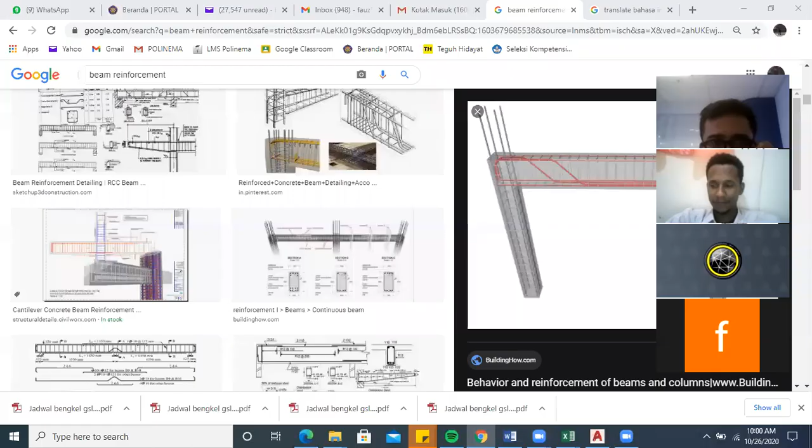Okay, this is the nice example.

Okay guys, now let's talk about the stirrup. I want you to focus on this part of the stirrup. This stirrup between the support and also the field will have very different spacing.

Why is that so? Because this is actually based on the calculations in mechanics of engineering, I won't explain that. But one thing you have to understand, this is the area of the support. So if you take a look, the stirrup is very close in the support, but it will have long spacing if the position is in the middle of the field.

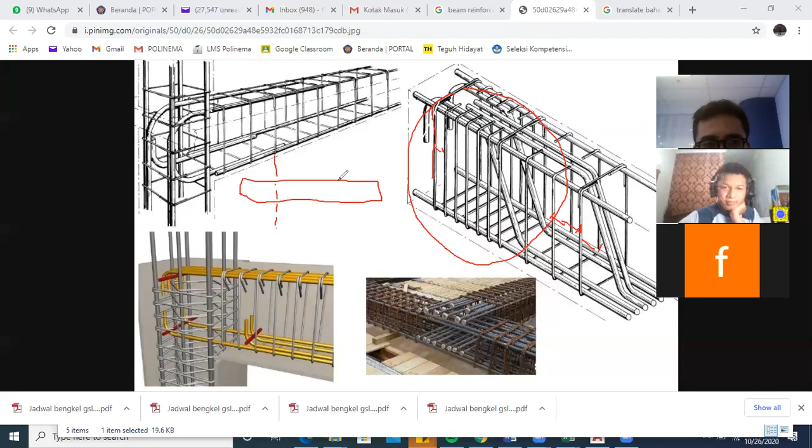Okay, for information, if I have a beam like this, the quarter part of the length will be the support, and a quarter here will be support, and a half will be field.

This can be noted, this is the basis from mechanics of engineering. So if I have a beam with the length 10 meters, my support in this part will be 2.5 meters, the support over here will be 2.5 meters, and the field will be 5 meters.

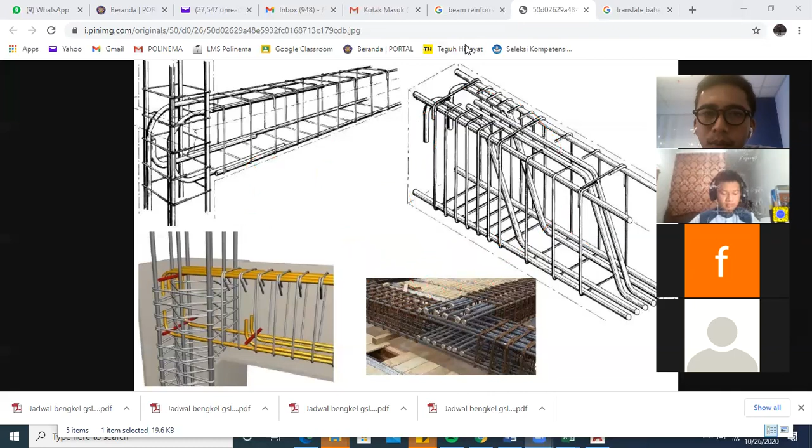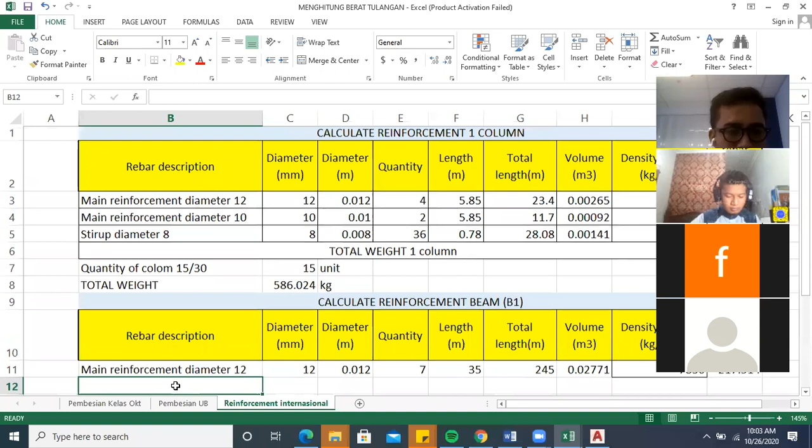Okay, after understanding those concepts, let's calculate in Excel again. I will write down the stirrup here, the stirrup with diameter 8 again.

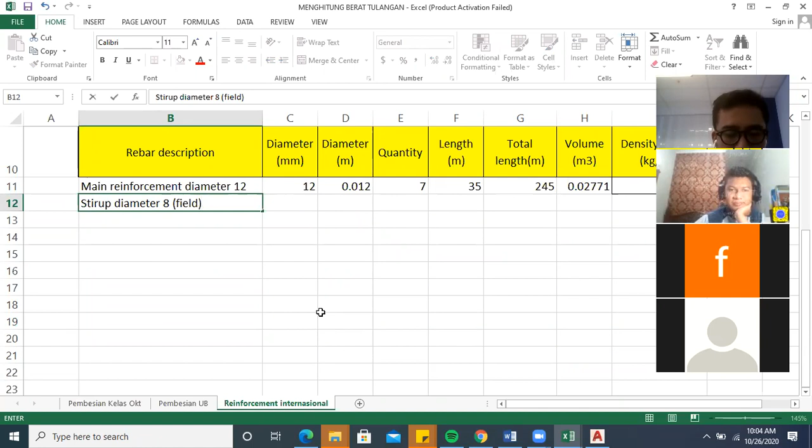But the position is in the field. I will do the same, I will make stirrup diameter 8 in support.

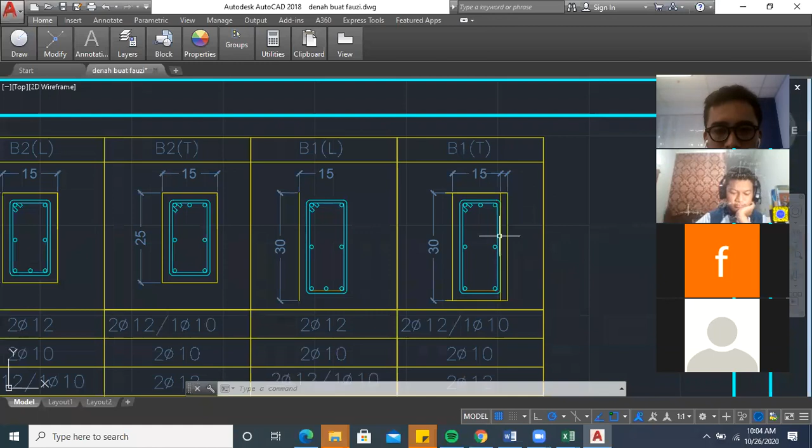Okay, I have the stirrup diameter 8. How do I know this diameter? I have to take a look based on the detail drawing. Okay, the detail - oh sorry, unfortunately it's not 8, I will revise first.

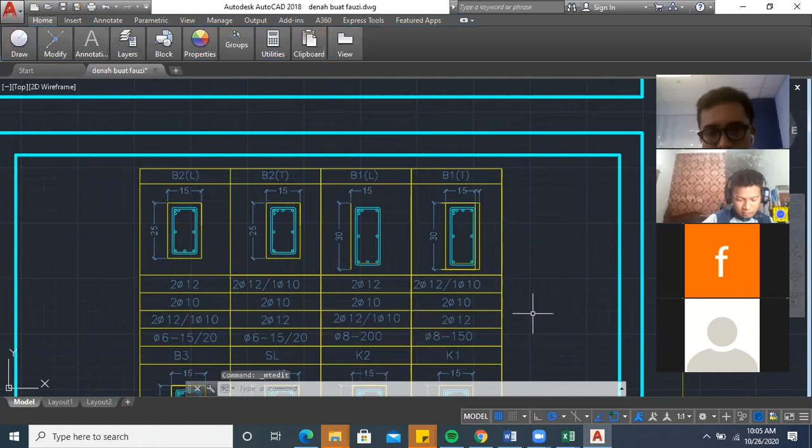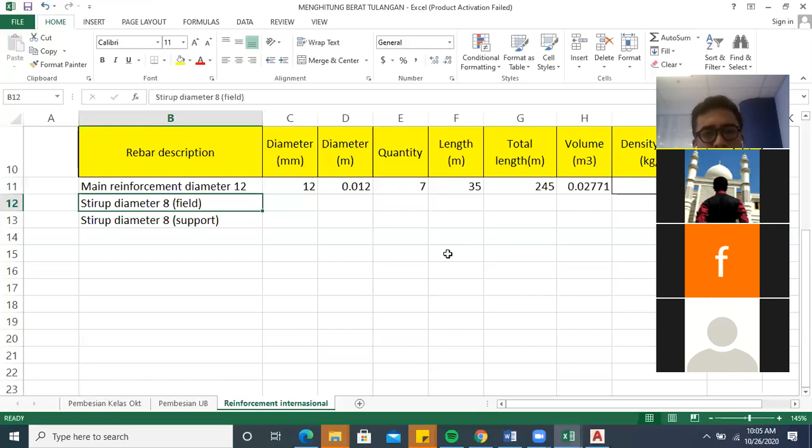Okay guys, so this is the spacing in the support, and this is the spacing 200 in the field. Okay, now first I will put the identity diameter 8. I will find the diameter in meters. Now the quantity.

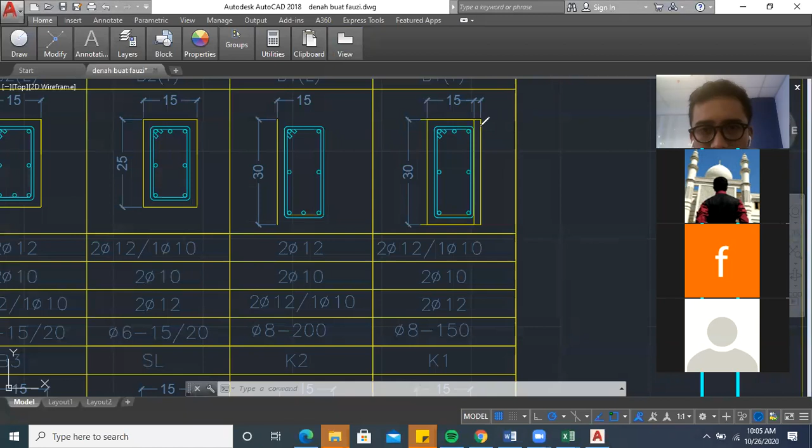Okay guys, after we calculate the stirrup, the band reinforcement, what we have to do next is calculate the length of one stirrup. So how do we find the length of one stirrup? Do you still remember how from before? You still remember, guys, how I can calculate the length for one stirrup?

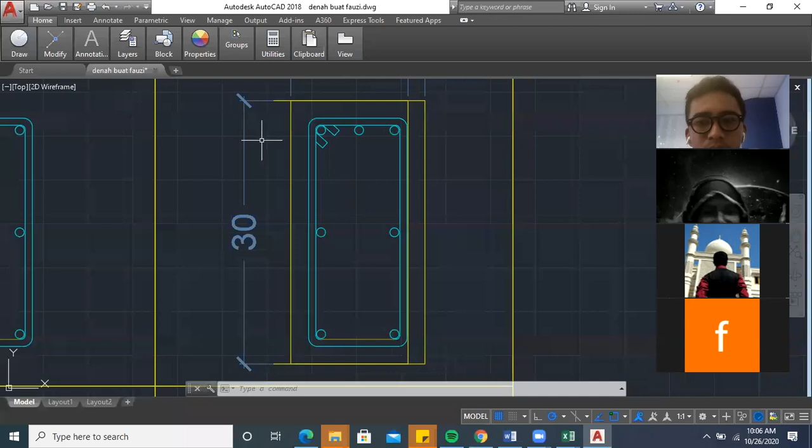Forgot, sir? Oh, forgot. Okay. This is the section of the beam with the dimension 15 by 30. We already know that the concrete has the concrete cover over here.

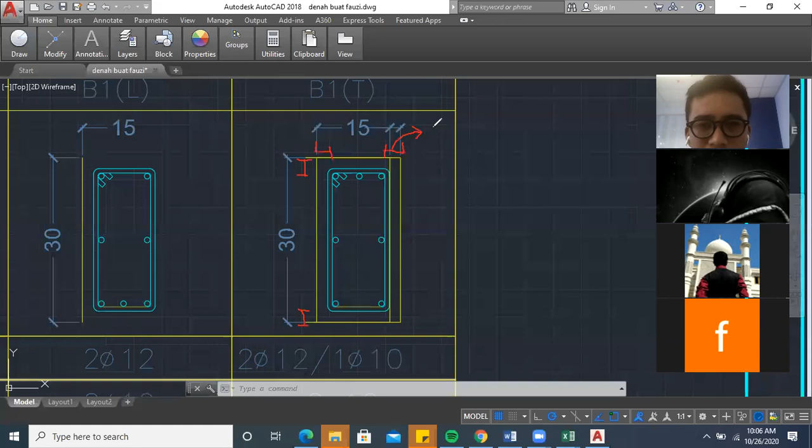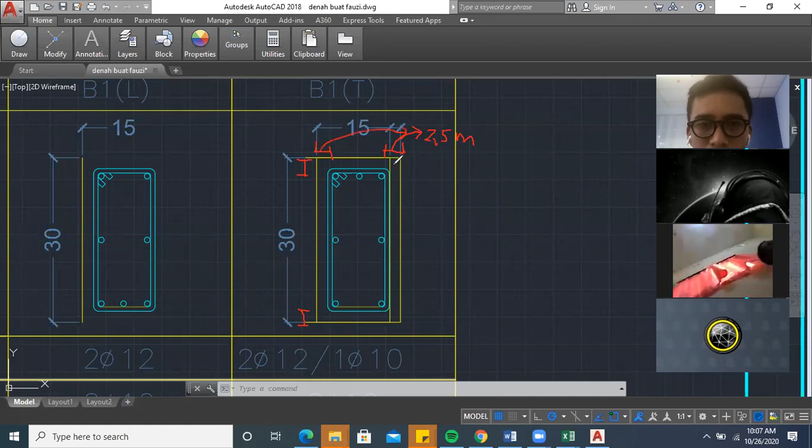To make the numbers nice. Let's assume that the concrete cover between this part and the reinforcement is 2.5 centimeters. This is 2.5, this is 2.5, and this is also 2.5. So the question will be, how long is this part actually?

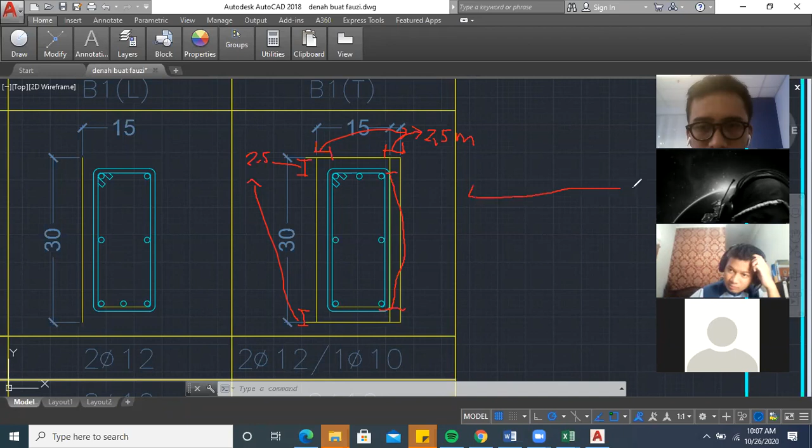How much? Okay, 25, 25 centimeters. What about this one? 10, sir, 10 centimeters. Okay, so I have 25 here.

If the stirrup reinforcement is extended, it looks like this: 25, I have 10, I have 25 also, and I have 10. Let's assume this is 5 centimeters, this is 5 centimeters.

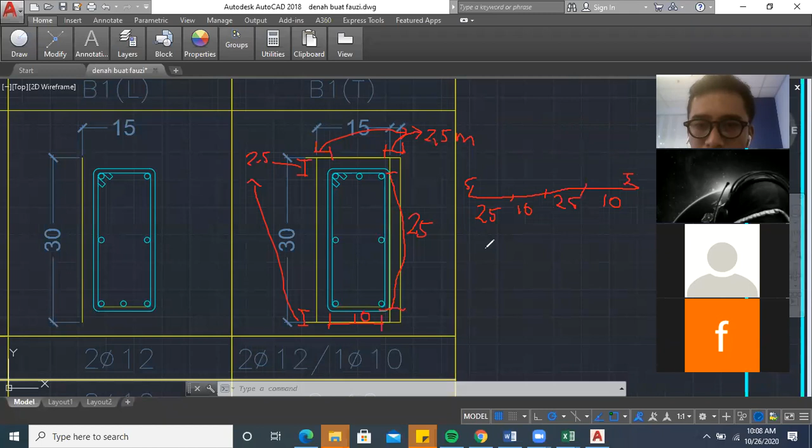So how many lines for one stirrup? What's the total? 5 plus 25 is 30, 30 plus 10 is 40, right? Yes sir, multiply by 2. That gives 80, 80 centimeters.

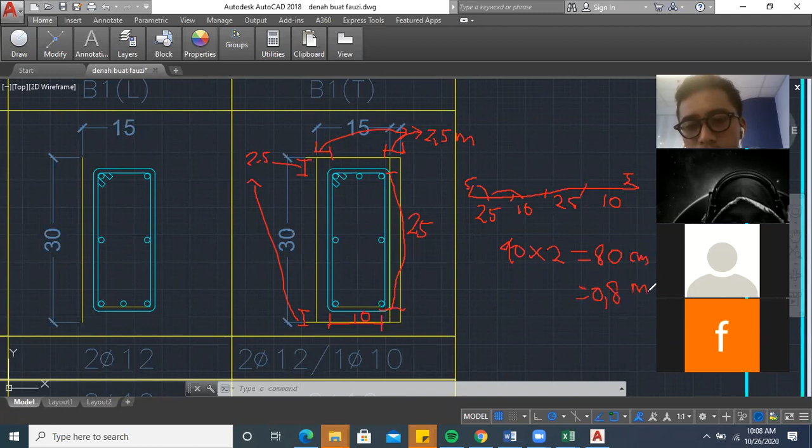Same as 0.8 meters. Okay, 0.8 meters we will put in our calculation in Excel. I have the length for one stirrup is 0.8.

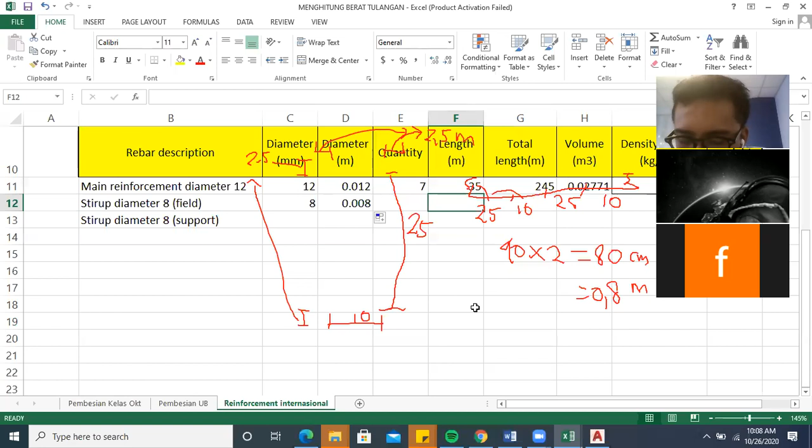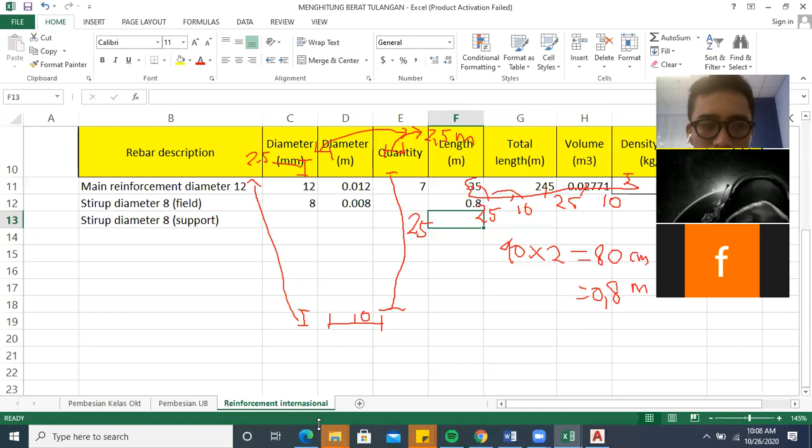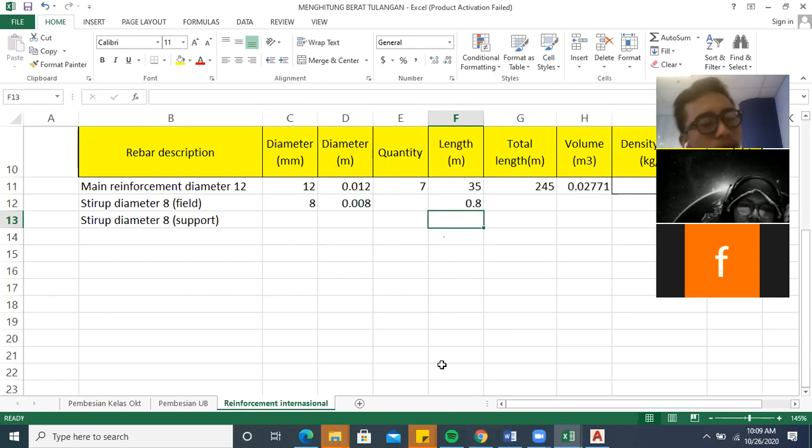Now the next question will be, how many stirrups do I need to put in the field? Anyone know? Don't know. Okay, before when we found the quantity of stirrups for a column, how did we do it? When we calculate the quantity of stirrup in column, there was a spacing.

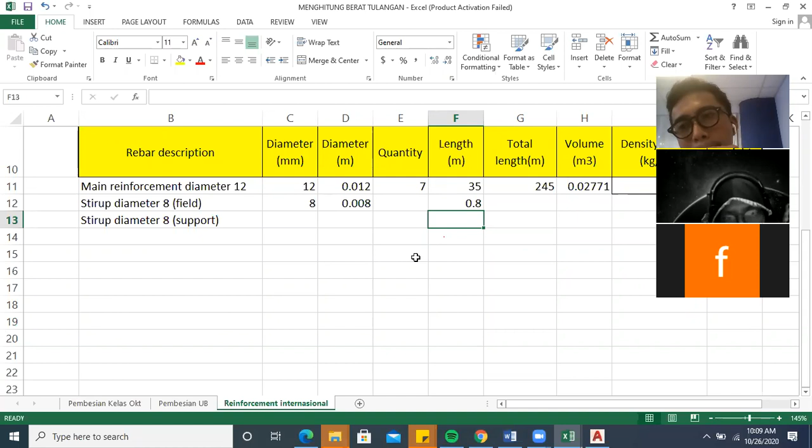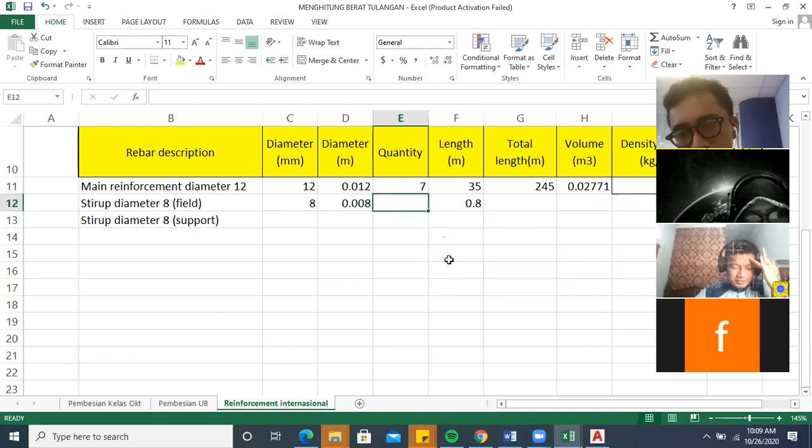Length dibagi 1,5. We do the same way for the stirrup, for the beam. First, we have to understand that half of the total length will be the field. So I will take 35 and divide it with 2, because half will become the field and half will become the support. I will take half for the field and divide it with the spacing between one stirrup and another, but for the position in the field. In the field, the spacing will be 0.15 or 15 centimeters. So the quantity for the stirrup that I will need is approximately 117.

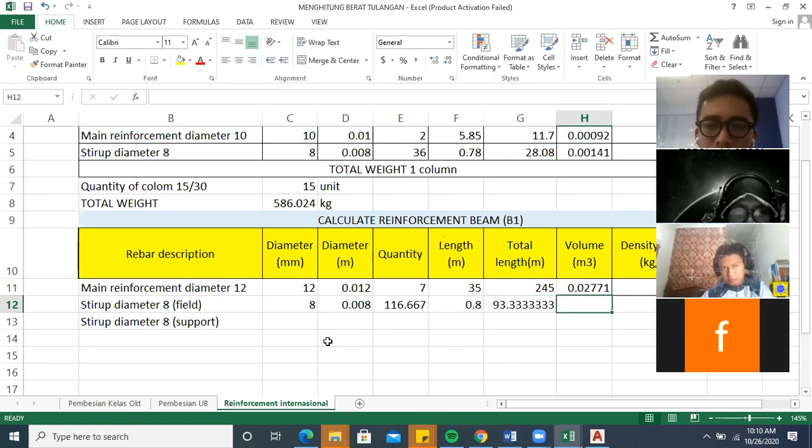What I have to do next is multiply this quantity with the length for one stirrup. I will get the total length of 93 meters. I will do the calculation for the volume, same like the previous calculation. I get 0.004. I use this density also, and I will calculate the rebar weight with this equation. So I get the stirrup weight about 36 kilograms.

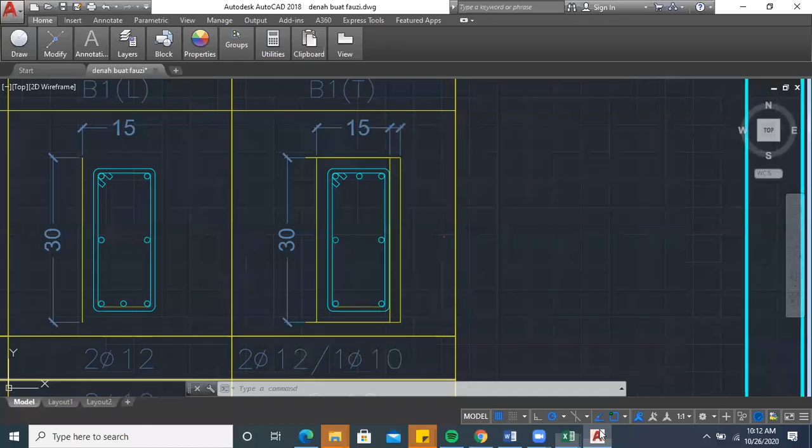I do the same way for the stirrup diameter 8 in the support. I get diameter 8, I will drag it down. The diameter we find the same way, and the quantity will be same like the previous calculations. I will divide 35 with 2, then divide it with the spacing. Sorry, I think I switched it, tertukar. Support itu 0.15, but field 0.2. Dari sini, ya, ini lapangan 0.2 and this is the support 0.15.

Alright, the length is the same. The stirrup basically has the same dimension. I will do the same way to look for the total length. The total length will be the multiple between quantity and length. I get this number, then calculate the volume like the previous calculation. I have the density of the steel also over here, and I will do the same calculation, multiple between the volume and the density of the steel.

Okay, the next step, I will accumulate the total weight for beam number 1. Just summarize all the numbers.

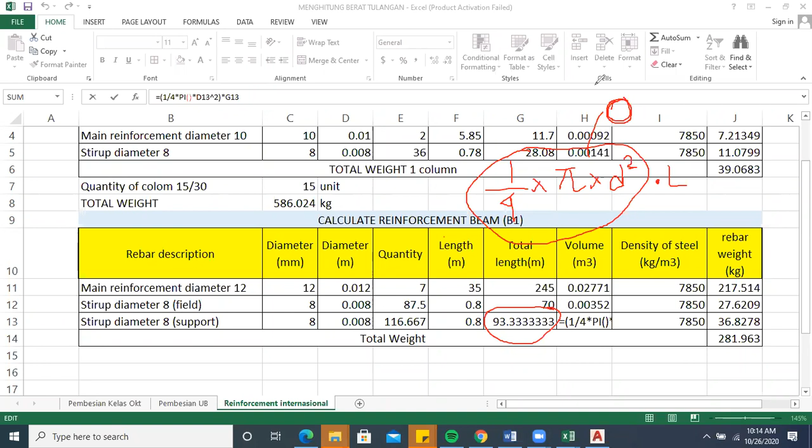And if you want to get the volume, you have to multiply this total area with the length. So this is actually the length that we're looking for. Alright, Abraham, clear? Ya, clear. Okay. Ada lagi yang tanya? Ya, clear Pak.

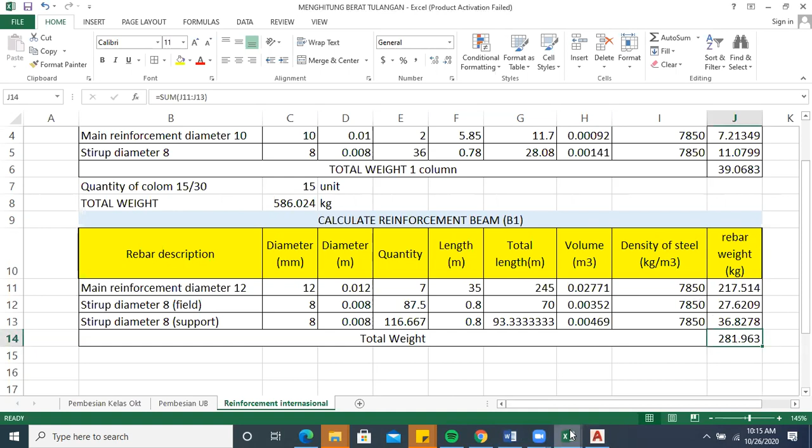Oke, thank you. Itu apa kita nggak usah bedakan Pak yang rebar weight-nya diameter 8 sama diameter 12? Oh, nggak perlu, kan sudah sama-sama dikonversi dan satuan kilo. Nanti di quantity atau in the calculation, you will not separate it between main reinforcement and stirrup. Jadi yang ada di RAB itu adalah total berat untuk balok. So what actually appears in the calculations for the cost estimate adalah the total weight, the final total weight.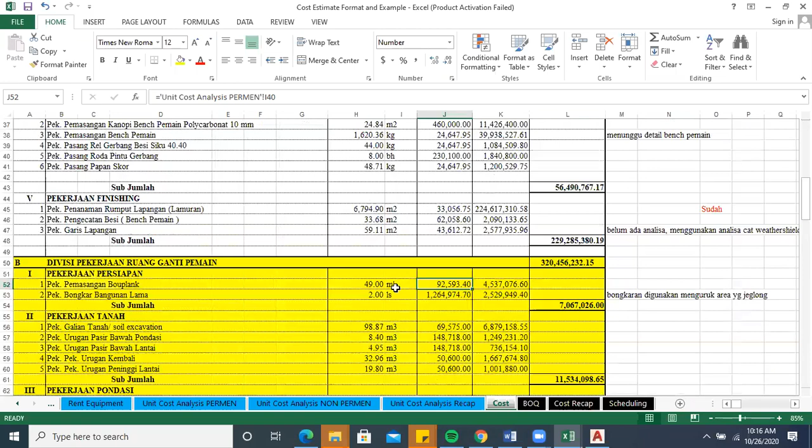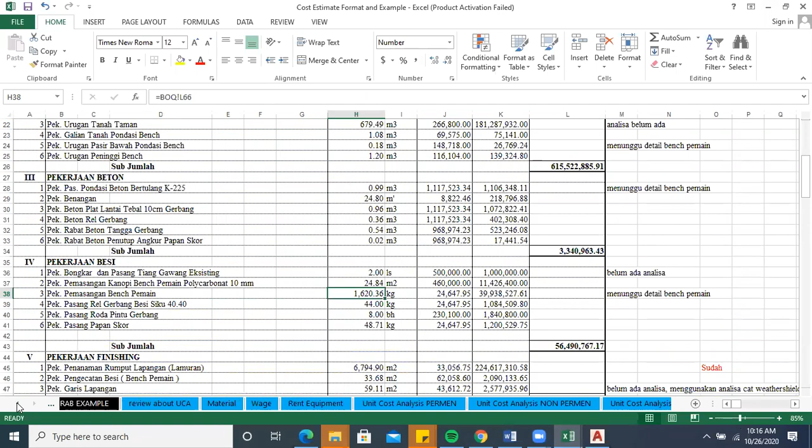Now you do the same way for calculating. Okay, this is the cost. If you want to calculate about kilogram units, itu akan sama semua. Kalau kilogram will be ini total. This is the total weight that we have to show.

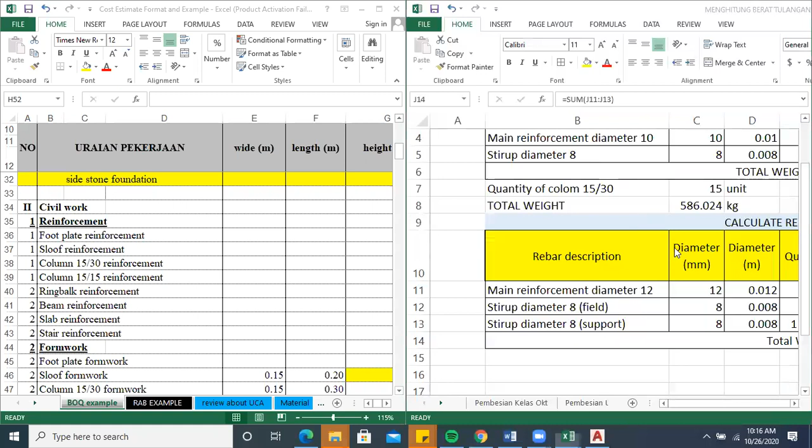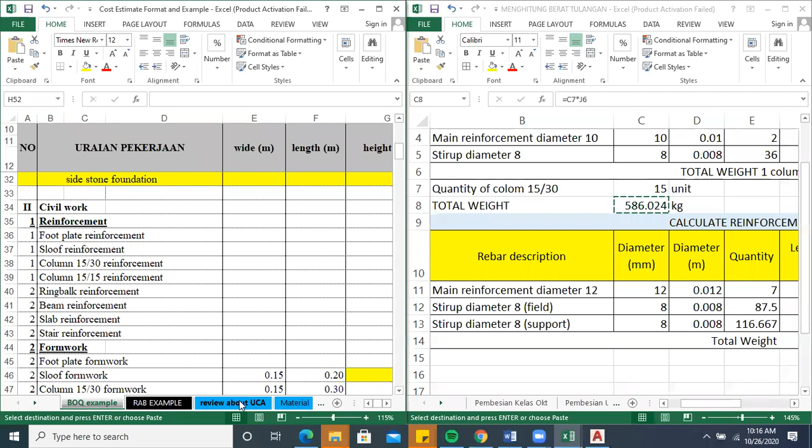Ya, mana tadi kemarin? Reinforcement for column, I already cut. Okay, 58, I will copy the number. The column for reinforcement. Okay, I put it over here. Square meter, kilogram. And the beam reinforcement, the beam reinforcement will be... Okay, wait a minute.